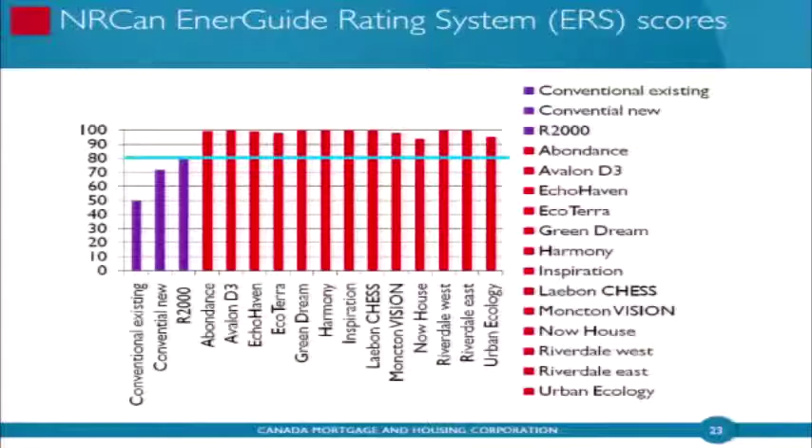So how did they achieve that kind of high level of performance in the models? Well, first off, they had a really high performance building envelope, lots of insulation under the slab, all in the walls, the basement, the upper walls, the roof.

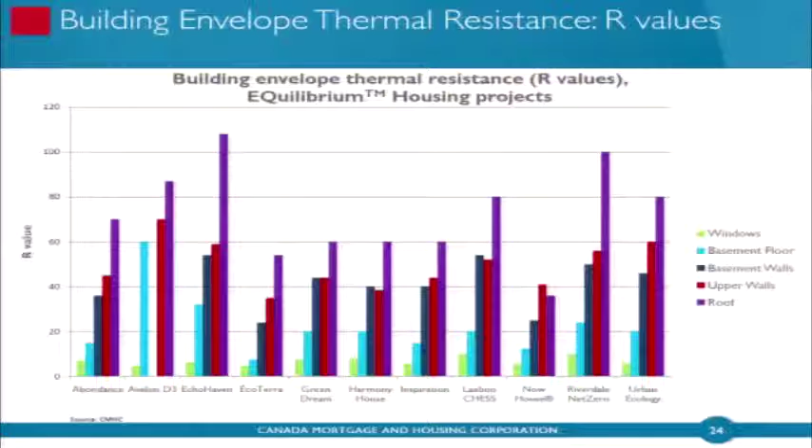Another key attribute they have is very airtight construction. All the projects ranged in their measured airtightness values from below 1.5, which is the R2000 standard, and a few of the projects even come in lower than the Passive House standard of 0.6 air changes per hour. The retrofit project there is the Now House - you can see, being a retrofit, we're able to measure the air tightness before and after the retrofit, so it improved from 5.6 air changes per hour to 2.6.

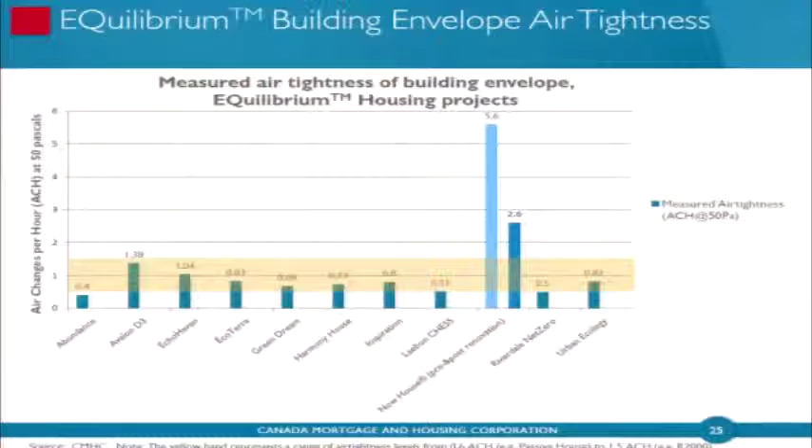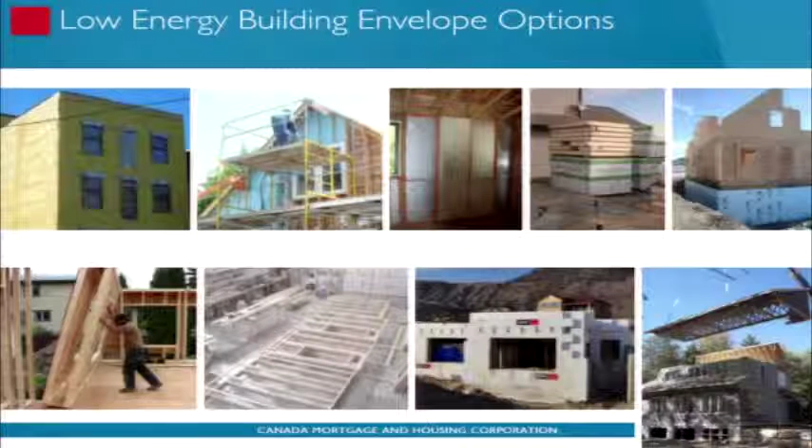Another really interesting outcome of getting out there and doing these projects is there was a whole range of approaches used in order to achieve these levels of performance, from spray foam insulation to vacuum insulated panels, structural insulated panels or SIPs. We had double frame stud walls built on site, and we had modular walls built in a workshop, and ICF insulated concrete formwork was used in some projects, and we even had a modular project that was built in a factory and assembled on site in one day. So lots of different solutions.

But one thing they all had in common was a really strong focus on energy efficiency and energy conservation. Again, through the building envelope performance features, as well as through the interior fit-up with energy efficient appliances, lighting, LED lights, low energy mechanical systems, and some teams even tried to reduce the amount of energy lost through phantom loads with all-off switches and things.

All the teams paid quite a bit of attention to optimizing the benefits of passive solar design, gaining lots of good natural daylighting in the homes, as well as capturing solar heat when you want it and shading out any heat gains when you don't want them. And all the systems integrated renewable energy systems so they can strive towards the net zero energy goal.

They used a lot of different technologies for photovoltaic and solar thermal systems — those were the majority. You can see lots of different technologies and applications done in the project, quite a range of solutions. And as a final step, they all tried to steal back some of the heat usually lost in a home through heat recovery from the ventilation system, as well as drain water heat recovery — that's the image on your right.

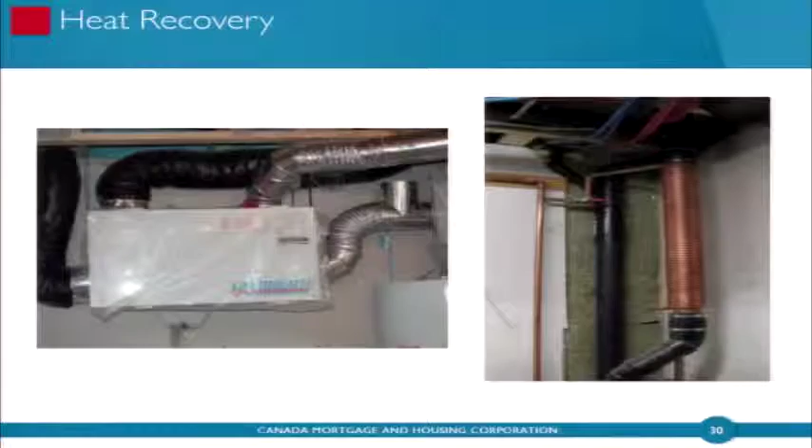So how did they actually perform once measured? In this graph there's a lot of information in tables and graphs, so you can use the presentation as a reference document afterward. The red lines here are the energy consumption values for the equilibrium projects compared to conventional newly built houses for about the same time period.

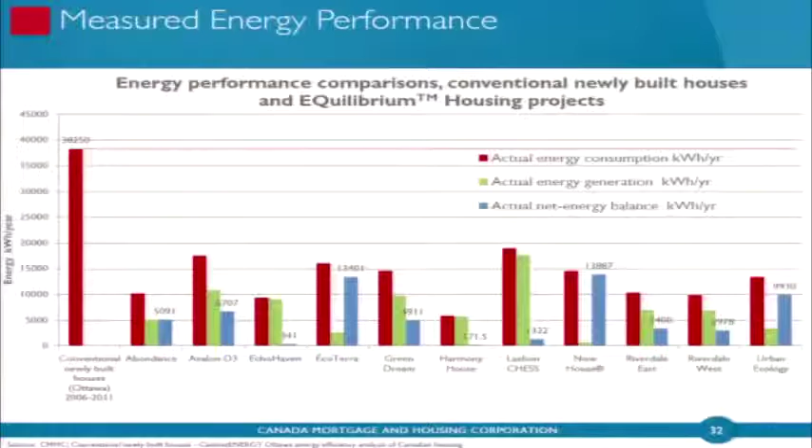You can see there's a fair amount of variation between the performance of the projects, and that had to do with where they are and the design goals of the teams themselves. But overall, the equilibrium projects use a lot less energy than the standard builds. The green lines are the renewable energy generation — in this case a combination of photovoltaics and other renewable systems such as solar thermal. And the blue is the net energy balance, which is the consumption minus the renewable energy generation — that's the difference.

But when you look at a low energy sustainable house — in this case the Avalon Discovery 3 project — we can see that the pie chart starts to change quite significantly. The largest energy load in the home now comes from the appliance, lighting, and plug load category. What's key here is that occupant behavior has a huge role to play in that measure.

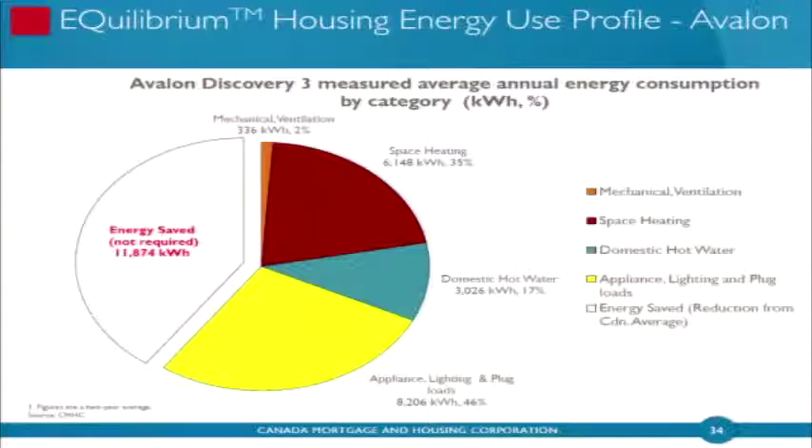Space heating has significantly dropped, and domestic hot water heating has been reduced as well. The big white square, just under 50%, is the energy you don't have to supply or buy in the home because of the high performance design features. And Avalon wasn't even one of the lowest energy consuming projects — some even doubled the energy savings on this.

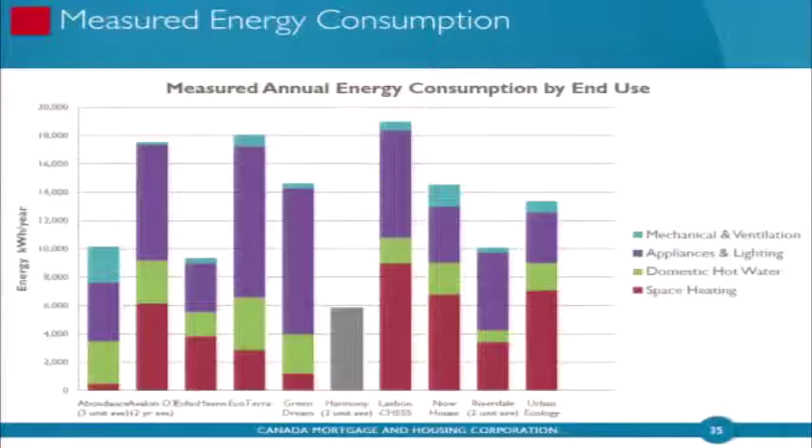This is essentially the same information now put into a bar graph, where you can see each of the equilibrium housing projects. Once again, for the majority of projects, the appliances and lighting category in purple is the largest single category, because the building envelope has now really reduced the heating load demands. The Harmony House project in gray is just because we only had the total energy outputs — we didn't have it broken down by different end use.

Some people like to look at energy intensity, which is the amount of energy used per meter squared per year. This is a similar graph looking at the 11 projects, and again you can see that the appliance and lighting area is one of the largest loads in homes.

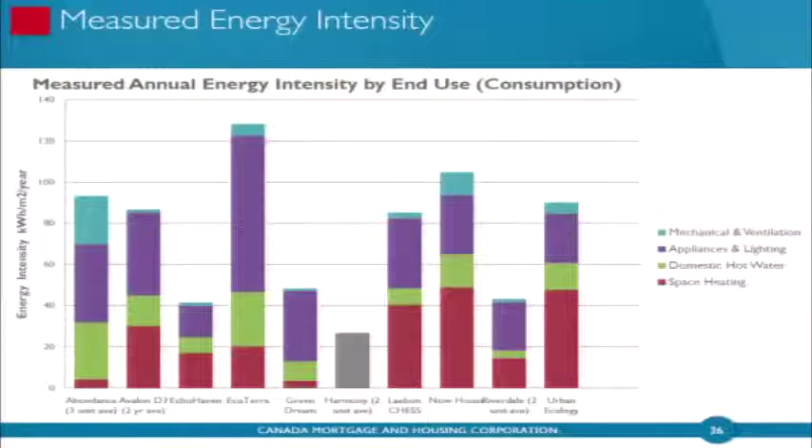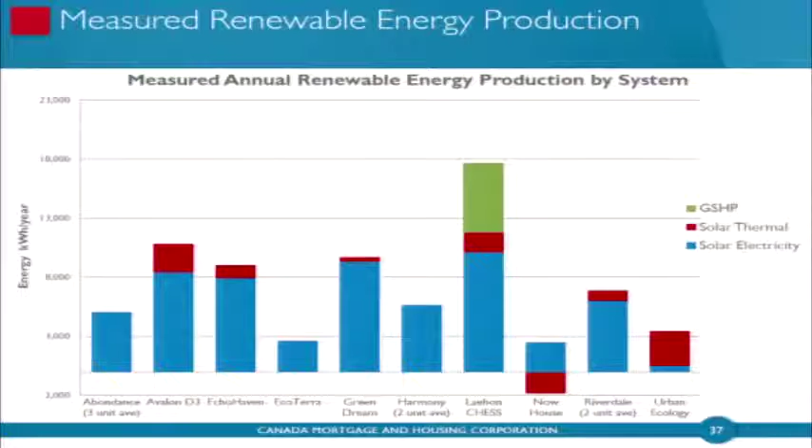Looking at measured renewable energy production, the largest contributor to the renewable energy side certainly comes from the solar electric or PV panel systems, with some contribution from the solar thermal system and a ground source heat pump in one project. The anomaly, for people noticing it right away, is on the Now House, the retrofit project — the solar thermal system actually caused an energy penalty. During the time of monitoring, it just was not performing optimally, or performing well at all, and it was actually costing money to run that system.

Of course, it's not just about energy, although we spend a lot of time on energy. These projects had to meet the 27 sustainability indicators, a broad range of sustainability features.

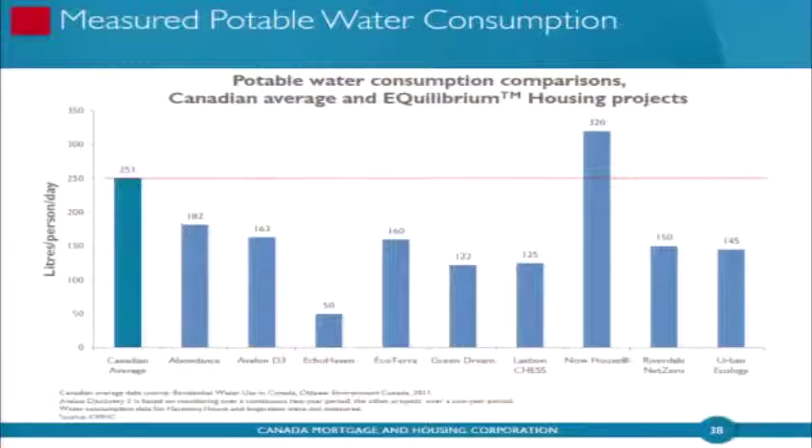We looked at measured potable water consumption for these projects, and all the new build projects show significant reductions in potable water consumption compared to the Canadian average of 251 liters per day per person. The Now House retrofit project did reduce its water consumption from before to after the retrofit, but it's still a bit higher than the Canadian average due to the lifestyle choices of that occupant.

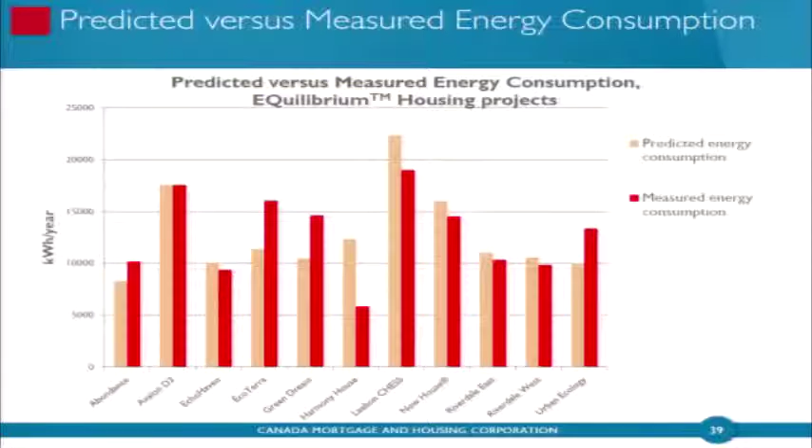In the first presentation, we talked a lot about modeling to achieve higher performance, and all these projects were modeled. Here's a comparison of the predicted versus measured energy consumption of all the different projects. In the majority of cases, the measured energy consumption was actually less than predicted, so for the most part there were no unpleasant surprises.

Looking at predicted versus measured energy production, for 9 out of the 11 projects, the measured renewable energy production was actually less than what's modeled. As Christian said, you're never going to get an exact match, but you want to be within an accurate range, and you want to keep calibrating your model to make sure it reflects as best as possible what can happen in reality.

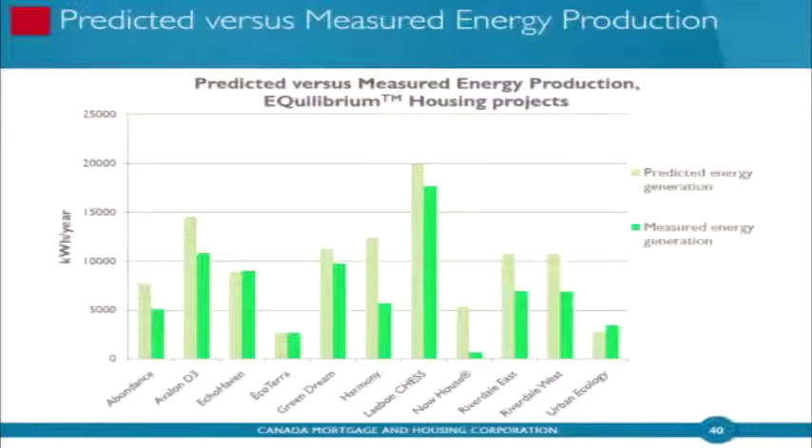I think there were a number of reasons for this that we found from site visits and investigations. Certainly in the wintertime, snow loads on some of the panels were a factor.

This one looks at predicted versus measured net energy. Again, in blue, this is the consumption minus the production values. We can see that during the one year of performance monitoring, none of the houses actually met a net zero energy housing target. But two of the projects are really, really close. The Harmony House just used 171 kilowatt hours per year—this is the net value—and EchoHaven just 341. So very, very low net energy use on these projects.

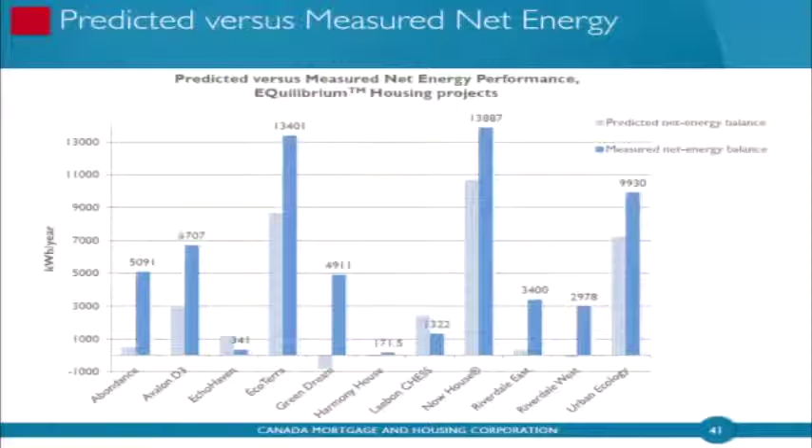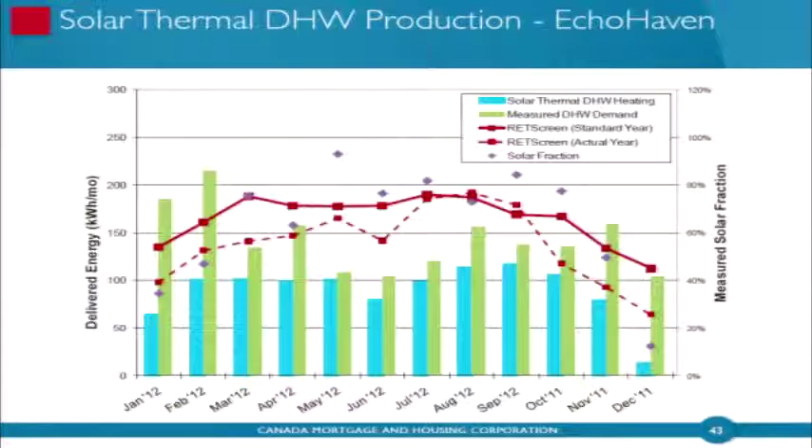Similarly, looking at the solar thermal domestic hot water production from the EchoHaven project, the modeled versions are in the red band and the measured are in the bar graph. In this case, it was the summer performance that didn't quite match up with the modeled predictions.

So after you do all that, and you've got this nice project at the end that you think is going to work well, and the performance monitoring shows it's doing quite well—will people actually like it? That's a key question to complete the loop, come full circle, and start looking at some post-occupancy evaluations. So we did market research with occupants who had lived in these homes for at least a year. Essentially we wanted to know what it's like to live in a near net zero energy sustainable home, so we could inform our process.

We got lots of good information and feedback. There's a full report available, and I've just pulled out some excerpts. Some interesting outcomes include that the choice of a sustainable home for respondents was primarily driven by an interest in the quality of the home, of course, but also its location. So the old adage, location, location, location, still applies here. It's really important where they are in relation to their daily trips, amenities, and services they depend on.

So we might have to change it to location, location, low energy, because location is still a key attribute. But of course, location has a lot of links to sustainability, because you could have a net zero energy home, the lowest energy home possible, and depending on where it's located, it can have a high impact on energy use when you start looking at transportation-related environmental impacts.

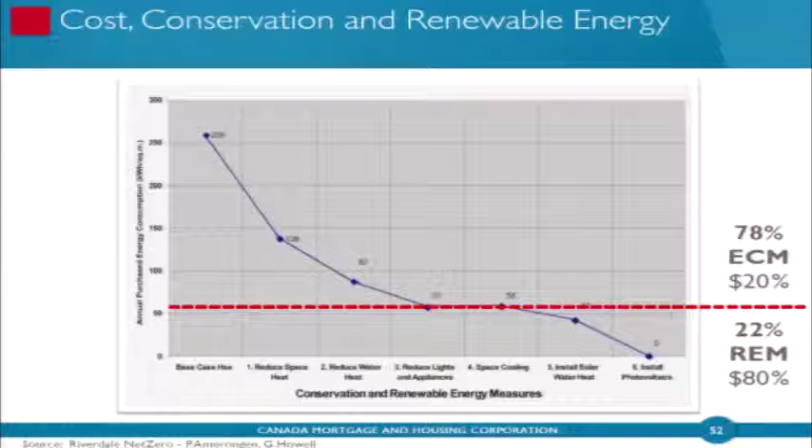To the point where nearly 80% of the distance of the journey to net zero energy levels of performance are achieved with 20% of the incremental costs in this example. To get the remaining 22% of the distance, you have to add renewable energy systems, and that resulted in 80% of the incremental cost loads to the home. So conservation first really is the simple and most effective approach.

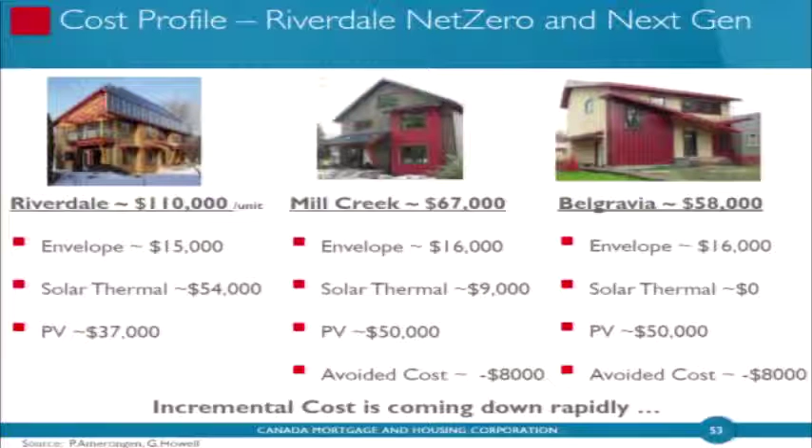Now, how did they achieve that? Essentially, they're gaining experience, and they kept the high-performance building envelope consistent across the board. They reduced and then eventually eliminated the solar thermal system and focused just on one renewable energy system and technology in-house, the photovoltaic systems. The avoided cost there is with the high-performance building envelope, insulation, windows, air sealing, etc., they found they didn't need a typical heating system, and they're installing inexpensive baseboard heating systems throughout the house, so they have some avoided costs and savings there.